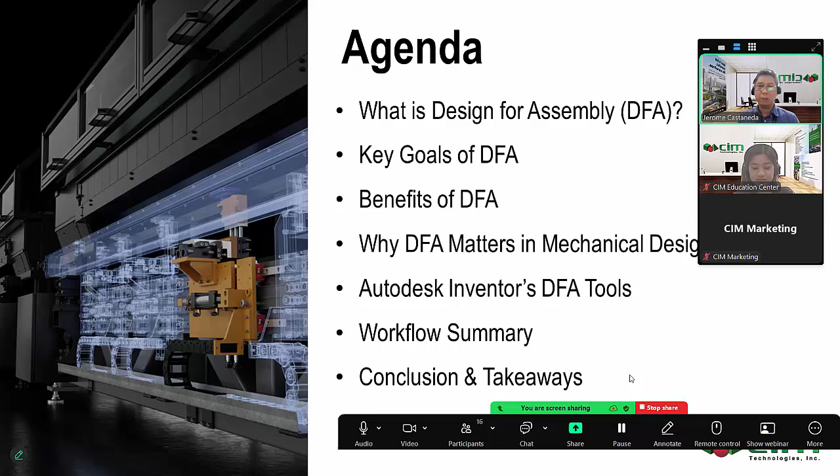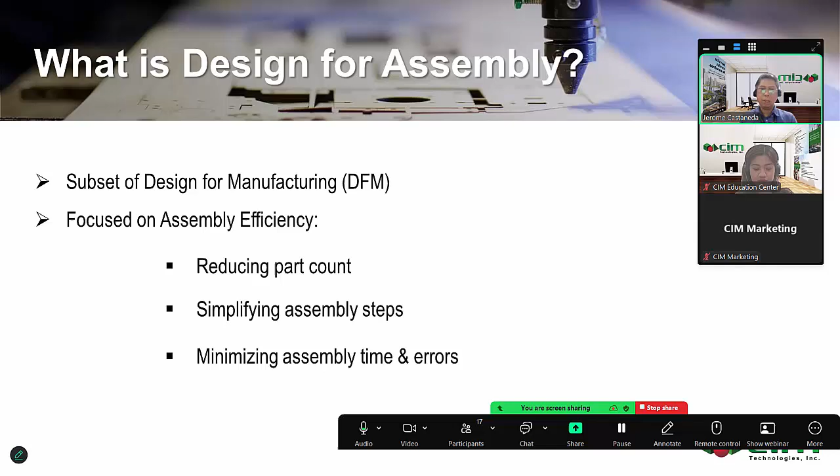So, what is design for assembly? Design for assembly or DFA is basically a subset of design for manufacturing. While DFM ensures a part can be manufactured efficiently, DFA focuses specifically on how parts fit together during assembly, and the goal is to make the assembly process faster and easier. Let me show a slide here. The goal is to reduce the part count and simplify the assembly steps, so it is less prone to errors, ultimately reducing our production costs and improving our product quality.

So there are several core goals in applying DFA principles. Number one is fewer components. That's our goal in creating our assembly: as few parts as possible, because fewer parts lowers our manufacturing costs, simplifies our procurement process, and shortens our assembly time. Fewer parts also mean fewer chances for something to go wrong or for error.

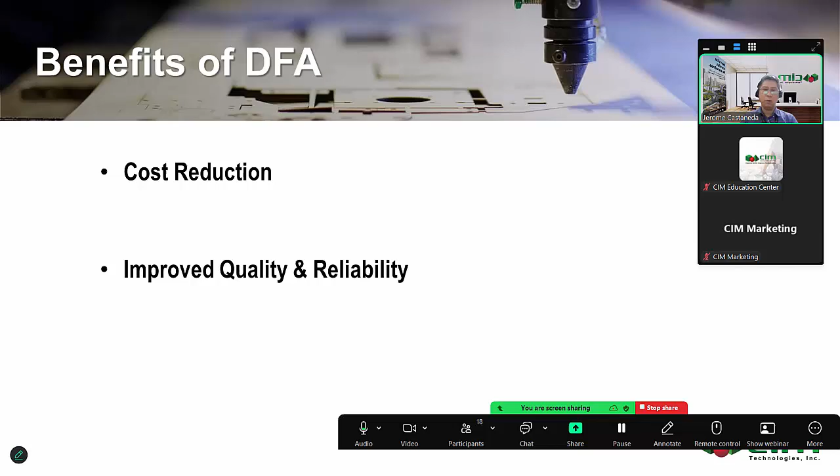So meaning, our simpler assemblies are more robust now, with fewer opportunities for mistakes, the human error. And of course, it should be simple. So don't make your assembly too complex. So the final products are really more consistent and durable.

And of course, because our designs are simplified, we are really able to move more quickly through our stages, our prototyping, our production stages, and thereby help you launch your products faster to the market, so you'll be able to be more productive.

Sustainable. So fewer materials and less waste during manufacturing aligns with our eco-friendly production goals and reduces our carbon footprint. Actually, here in CIM, we stand by this rule: design and innovation for a sustainable future. This sustainability is actually part of the United Nations goals. Some are even making sustainability part of ISO, 14001.

And of course our operational efficiency. Efficient assemblies mean smoother workflows, better use of factory space because there are fewer assemblies, so you have more space. And then our bottlenecks in the production lines are reduced. Fewer people are needed to do the assembly.

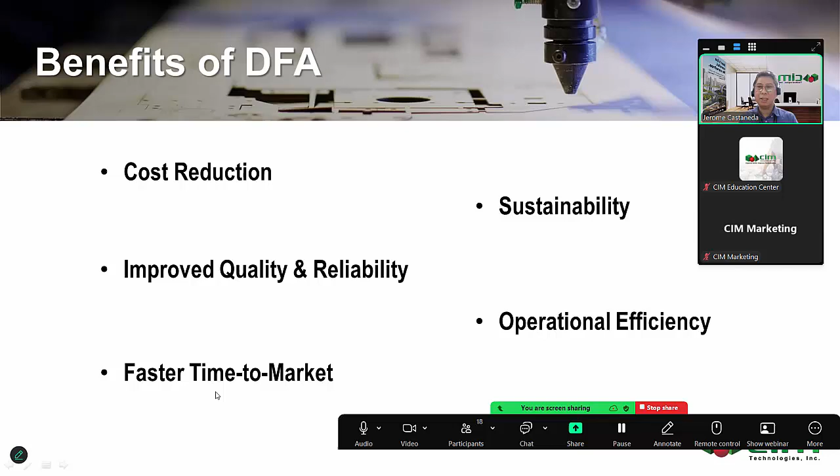So why does DFA matter in mechanical design? Early impact and long-term value. The DFA decisions made during design have real downstream impacts. It is much cheaper to make changes on a CAD model than on a shop floor. So our digital tools are very important; later we will show you some of the tools we can use in Inventor so that we reduce physical prototyping, which can be costly.

And then design-manufacturing synergy. DFA encourages our designers to think from the assembler's perspective. In my previous experience, I used to do mold design, making plastic injection molds. But we had to go to the shop floor because we had to disassemble the molds when we weren't designing. There we really saw what we designed and how it was assembled.

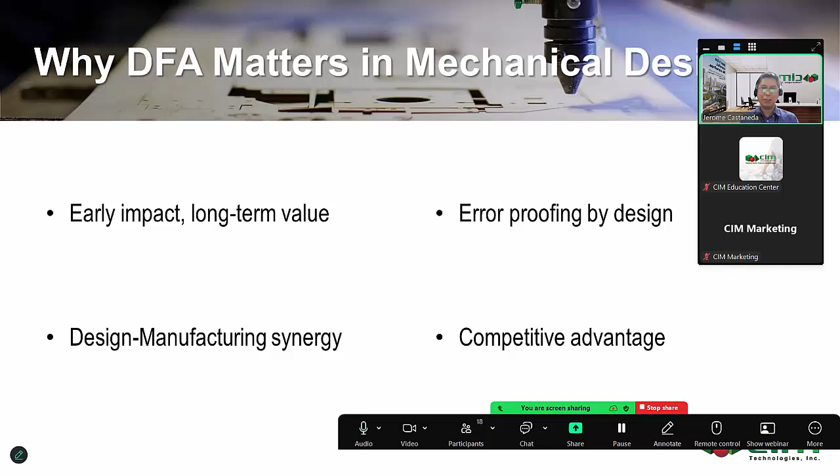Let's go to Autodesk Inventor's DFA tools. What can we use? Part simplification. In Inventor, if you have a very large assembly design, you are able to simplify the assembly such that you can merge, even suppress features or components you don't need, and eliminate unnecessary parts. This is particularly useful when components are aesthetic rather than functional, or when simplifying our models.

So if you are able also to capture the other webinar, so we can also actually integrate yung ating mga mechanical components to Revit, no? This is how you also do this, yung mga BIM coordination. And of course, yung for when you want to share information with clients, no? Kasi you don't want to expose that much information or detail. So perhaps the overall length lang it matters, no? So the length, width, and the height.

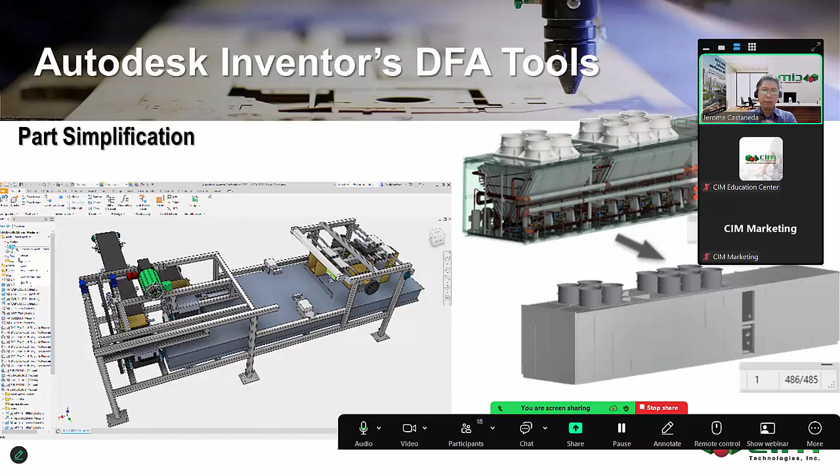Tapos dito naman po on the left side, a conveyor system naman is a simplified way to really focus only yung mga functional components. So this really helps po in improving yung ating performance and reducing yung ating file size, no? Thereby, it makes yung ating model easier to work with within the simulations or even just in documentations po. So in short, this is a smart way po to really streamline your design without even compromising on the key details, yung mga overall length, general size niya.

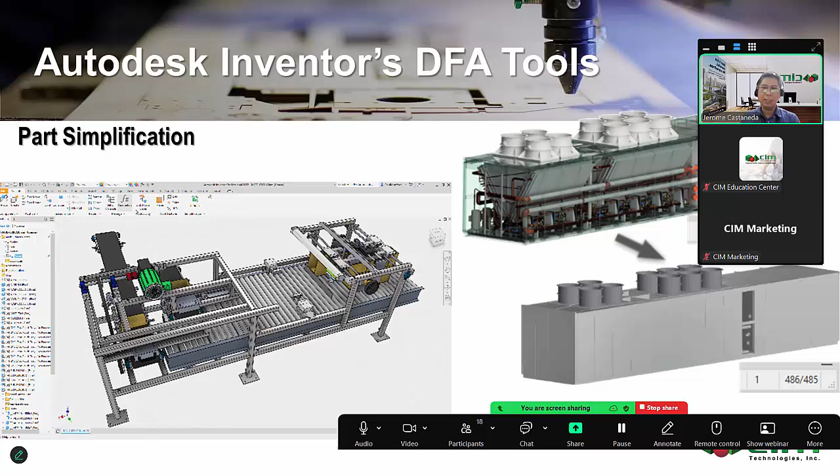And then next po yung assembly analysis. So with this tool, we can simulate how a product will be assembled po using different types of model states, no? So this really helps us po to understand the mga step by step assembly process, without really the need for that physical prototype. And then ito nga po as shown in the images,

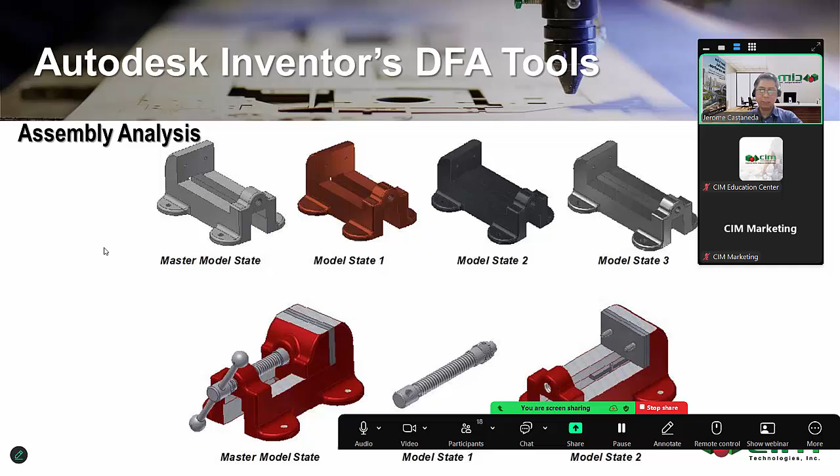so we can have a model in multiple iterations, in different colors, and so this is a vice grip, no. And then letting us po evaluate yung mga different configuration, yung mga test fit, and then identify potential mga assembly issues. So you can actually isolate po from a master model. You isolate only one component, and then perhaps a different view, a different component. So this is really very useful po for improving, makikita mo yung manufacturability niya. And then, of course, marireduce po yung errors, and save time po during production.

So this is also another tool that we also use, yung tinatawag na automated bill of materials. So here in Autodesk Inventor, with just a click of a button, you can automatically generate the complete list and accurate BOM based on your assembly model, in 3D model niyo po. So this also includes yung ating mga part names, part number, of course yung mga quantities, how many pieces or sets ba yung mga screws, nuts and bolts, and then of course anong mga materials, very important, and other key properties na pwede niyo pong i-highlight din, that you can pull directly from your assembly.

And this actually saves time po compared to if you are just doing this manually. If you do this in AutoCAD, and then you just input those manually in Excel pa, no? Especially if there are lots of parts there. So you can customize po yung ating BOM format, and you can actually export this into Excel sheets.

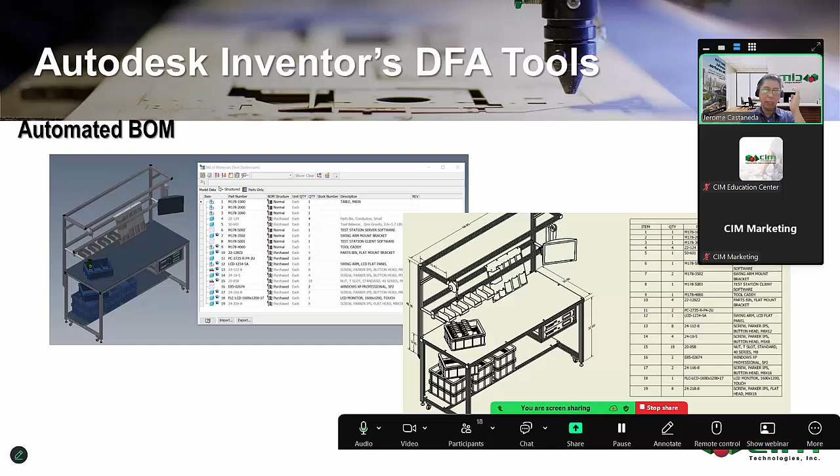Here we can also take advantage of our product data management o yung Vault system natin, this is a good tool so that you can also collaborate with other non-designers. So yung mga shop floor, or say for example yung mga procurement. At least malalaman ng procurement, available ba tong mga off the shelf na mga libraries ko, mga content set. May mga supplier ba tayo na available para dito. So while you are still on design, malalaman mo na, no? So you are able really to know that the parts are there and complete. So really streamlining po yung ating engineering and manufacturing workflows.

Ito po, it's a very very important tool po sa CAD tool, yung tinatawag na interference detection. Imagine na lang pag wala kayong ganito. So you just design, and then you manufacture your components, and then pagdating doon sa assembly, uy, hindi pumasok. Mali. Maliit yung butas.

That's why interference detection is very important. It really identifies parts that have overlap or conflicting parts in your assembly, so that issues that could cause problems during actual manufacturing or assembly can really be minimized or eliminated.

So it's really a very simple but very powerful feature, so that you can really catch those very costly design errors. Money is involved there. So it ensures that parts fit together as intended.

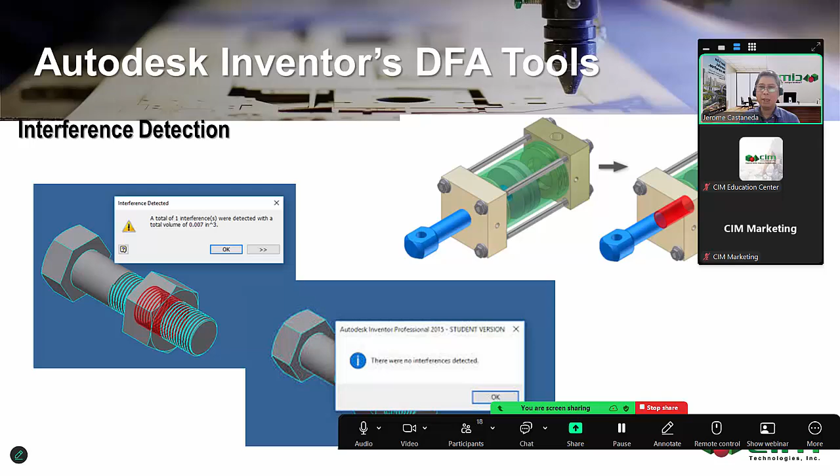Parametric design - since Inventor started in 1999, parametric design has already been there. With Inventor's parametric tools, we can create models that are fully driven by our dimensions and constraints. So what does it mean?

This is really special, especially very helpful for designing families of products, or when you do a lot of frequent changes - it saves time. So it also supports our design automation. We actually have a tool for that, called iLogic.

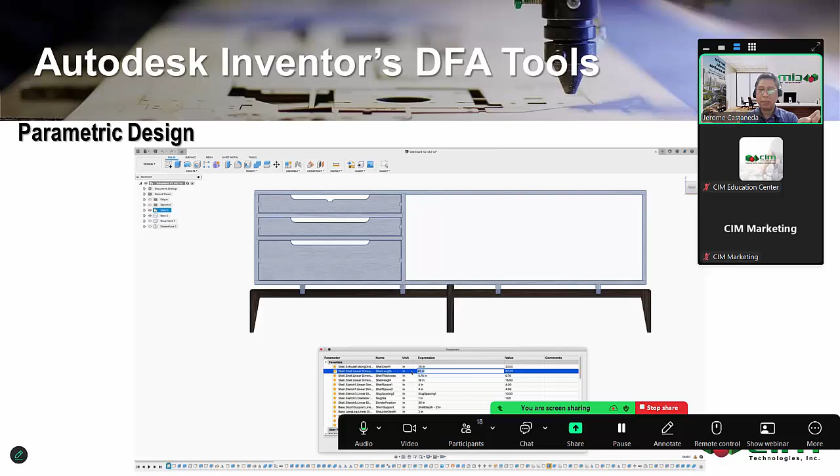It's a very powerful tool that can be used by sales as a brochure. If you make use of brochures or posters, you can make use of your 3D model and create a family of models - in this case, different sizes of our furniture, different heights, or even the color.

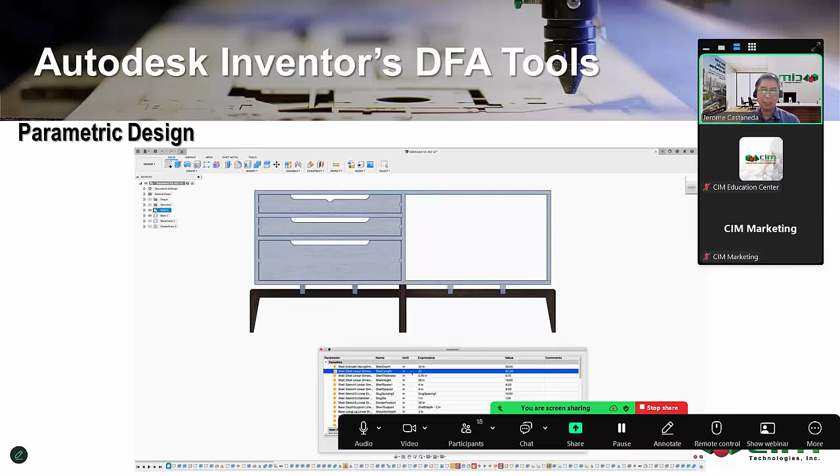You can let them select those parameters on your website, and then at the end there's a request for quotation. So it's a very powerful tool, this design configuration automation.

So with these tools, we ensure that anyone working with the product, from the assembly teams to the client, really fully understands how everything fits together - where to start, what is step 1, step 2, and step 3.

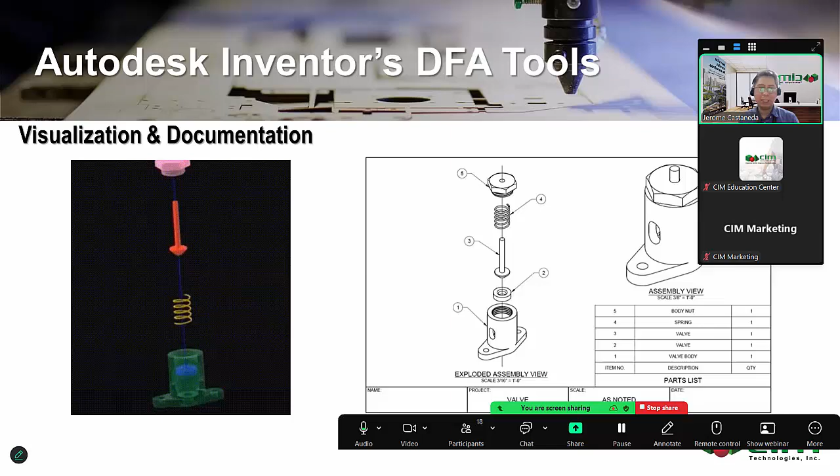Workflow summary. Let's walk through a typical workflow when applying design for assembly principles using Autodesk Inventor. First, the design - of course we start with the core design, where the engineers lay out the functional requirements of the product.

It is really very important to keep our design for assembly principles in mind even at this early stage, to avoid complicating our design, by creating a functional CAD model. So it should be function first before aesthetics, like the design curvature - the function of the model comes first.

And then consider our initial simple part shapes, materials and interfaces - simple designs like the iPhone, simple designs, right?

Then optimize for DFA. Once you have your initial design in place, we apply our principles in DFA, which includes simplifying components.

So reducing fasteners, kung hindi naman kailangan ng nuts and bolts, di ba? And minimizing yung part orientation complexity, yung position ng mga piyesa baka hindi tama talaga. Kailangan siguro i-rotate ng konti para mas madaling i-assemble.

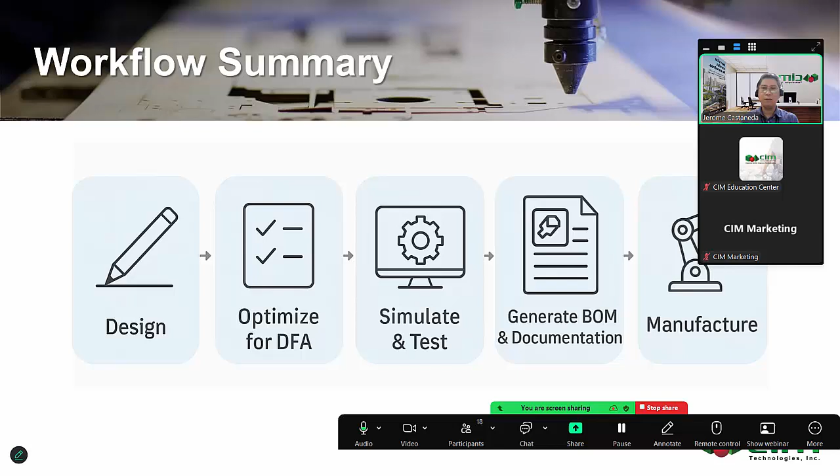So Inventor plays a big and critical role in enabling you to simulate, validate, and document your design with design for assembly principles already in place.

So to wrap up, let's revisit the core ideas that we have covered today. Design for assembly is more than just a manufacturing concept, it is a design philosophy that helps create smarter, more efficient, cost effective products, by simplifying parts, minimizing assembly steps, and reducing the chance of human error.

So DFA leads to faster production and higher quality results. Autodesk Inventor plays again a critical role in this process, giving us the tools to simplify, simulate assemblies, detect conflicts, and generate accurate documentation, all within the platform.